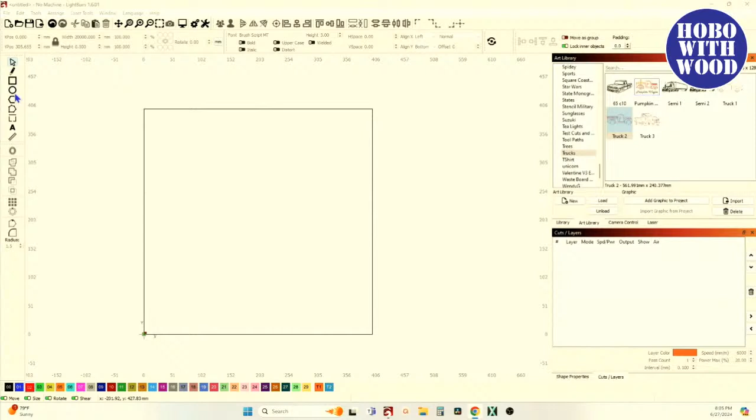And in fact, we'll do a quick idea. I'm gonna come up here. These trikes you see, they're not like a child's trike. A child's trike, well, you'll see a lot of times with the small wheel in the front... or sorry, other way around, small wheels in the rear and a great big wheel in the front. But these adult trikes, they'll be pretty much the same size.

And then you'll have — I'm going to do a basket on the rear.

And then we're going to come up and have handlebars coming out on either side of it, and coming down, attaching to the basket, and then it'll come up and have a seat that's going to be just above that. So these handlebars are going to need to be at least as high as that, and that's kind of why I'm sketching this out now.

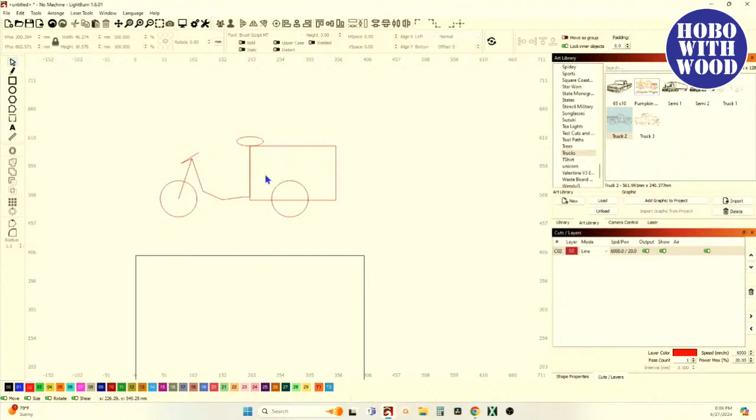I'm going to create the basket first, and then draw everything proportionally to the size of the basket. Then I'll do it so that the basket and the rear half of it, the basket and the rear tires and all that, can be cut out and assembled. Then this piece will be cut out and attached to this.

The handlebars are going to need to be separate because they're going to be on a different plane, because this will be flat. And of course we want the handlebars going across it. The seat the same way. So that'd be one piece.

I entertain the idea of making the front fork actually split and putting a separate tire in there. You could do that by creating the single piece and then doing like I did for the fan on the windmill - just cut two small accent pieces and glue them here over it to make it look like the fork went around the sides of the tires. That's probably what I'll do, because that'll give some more dimension to it.

All right, so now I need to open up a different tab, and let's go to Gravini.

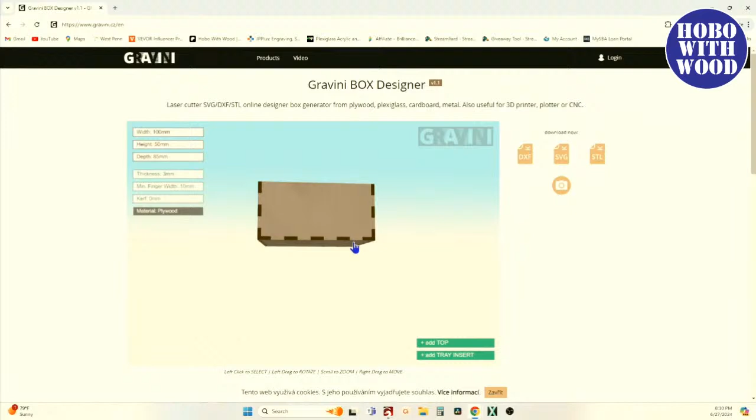And I'm happy with that 10 millimeter finger. I've got 1, 2, 3, 4, 5, 6, 7, 8, 9 fingers across there, and I want an odd number here because I want one.

If I come up here, you'll see that's on the bottom - that finger is solid from the bottom, and I want a solid finger right here, not a tab in the middle, because this is where I'm going to attach my tire or my wheel.

It's going to be a separate piece that will attach to the basket, and I'll create an additional tab that protrudes beyond the outer perimeter that the tire will slide onto. So having that centered there helps keep it all symmetrical.

Now what I'm going to do is use Gravini to create the basket. Here I'm just left clicking on the side of that panel right there, and now I'm left clicking and holding the left button, and then I can use my trackball to spin it around.

But if I just click, it'll give me these options, and I can put different patterns in this panel. So if I wanted it to look kind of baskety, I put those diamonds there, spin it, do it again here, same thing here and here. Now you've got kind of a basket looking design.

Or if you didn't like that, just right click it again and uncheck the diamonds and say, you know what, let's do the bricks instead. I didn't even have to uncheck it, I just have to select it. But if you're looking at it from a point of view like this, here you could click and that's going to get that panel.

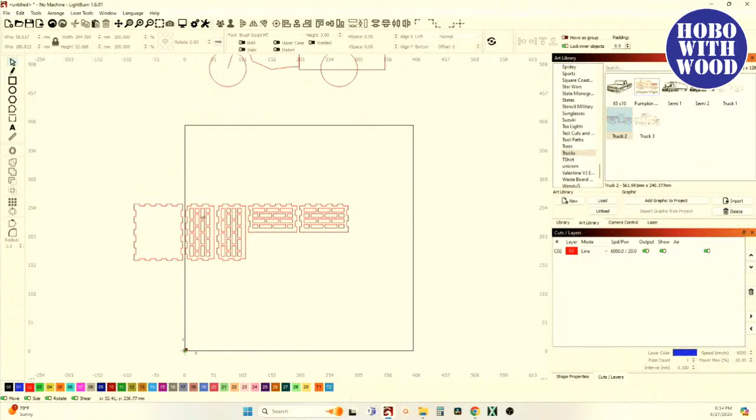Let's see here. All right, so now let's get back over to Lightburn. What I'm going to do is select all of that basket, come over here, and orient everything correctly.

These are upside down, if you will, so rotate those. This one I'm going to rotate once, bring it down here, and then bring this one. I'm orienting this way for a reason - that's the top of the basket, and I don't really want a straight line across my basket. I want to give it a little bit of flair, if you will.

Let's select all of that, ungroup it. Now that it's all ungrouped, I'm going to go to my node editor. So there are no nodes across the top of this except for the corners.

Something I do that probably no other creator does, unless they're watching Hobo with Wood and figured out - this is a good way to make my files LightBurn friendly, so I don't have people screwing up the file or complaining because they don't know what they're doing. I'm going to make this file LightBurn friendly now while I've just brought this in from Gravini. I'm going to fix it so that Lightburn only recognizes a slot as a slot and a tab as a tab, because right now it will recognize it either way.

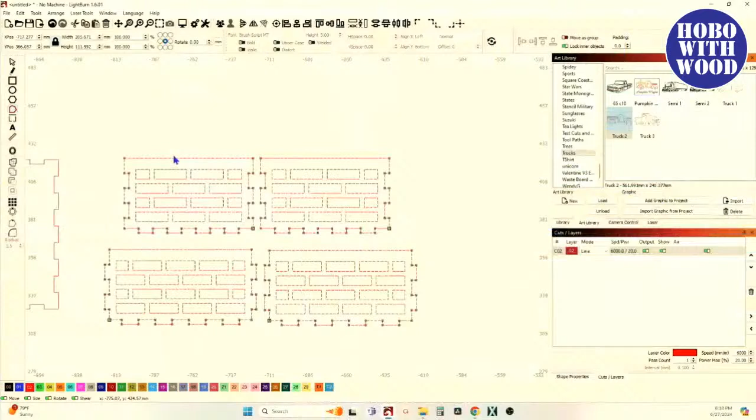So back over to Lightburn. I'm going to select the entire thing, go into node editing, and here's what I'm talking about. In fact, there's something screwy going on here. This is grouped, but there's nothing for it to be grouped to. And I can tell at a glance it's grouped because this right here shows a dash, dot, dot, dash, dot, dot, dash, whereas these are all dashes. And this is not grouped with anything over here, so there's something funky going on.

So I'm going to select just that piece and hit ungroup. Now it's just dash, dash, dash, dash, dash. And I guarantee you there's nothing there. If I select everything, I don't want to get it all. I want to go just shy of it. That way, if there were any loose artifacts, it would grab them, but not grab that whole thing. And then here I'm leaving the other side. But see, it grabbed nothing. There was nothing there for it to be grouped to.

So that's a ghost in the design. And some of you may have had it. I've had different designs I'm working on, and then down here at my origin, there'd just be a random piece that gets attached to a layer. And then I can find it and delete it and it goes away. I don't know what causes those to propagate or create themselves, but it happens. All right, it's all ungrouped.

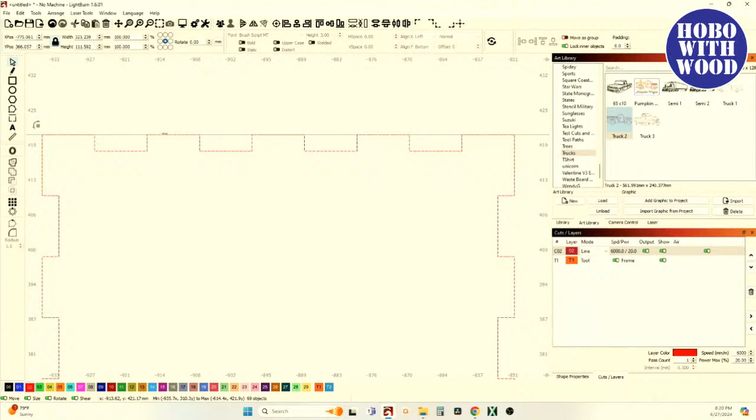Now I'm going to go to node editing, and I'm going to come over here. And like I said, here is a corner. Here's a corner. Anything that's on that plane needs an extra node in it because it should not be recognized as either a slot or a tab. I don't need to do this for my benefit. I'm doing it for yours. I'm going to come over here and grab a tool line, drag it down, and pop it right there on the corner. Anywhere that tool line intersects with the piece will get a node, because as you can see, that makes that solid. So these are obviously slots, not tabs.

And so I'm going to come back here to the node editor, and anywhere that intersects, I'm using the letter M for middle to put a node right there in the middle. Now I'm going to come right down the side. Same thing from that corner to that corner. So middle, middle, middle. At the bottom, middle, middle, middle, and up the side over here. Now, get rid of that line.

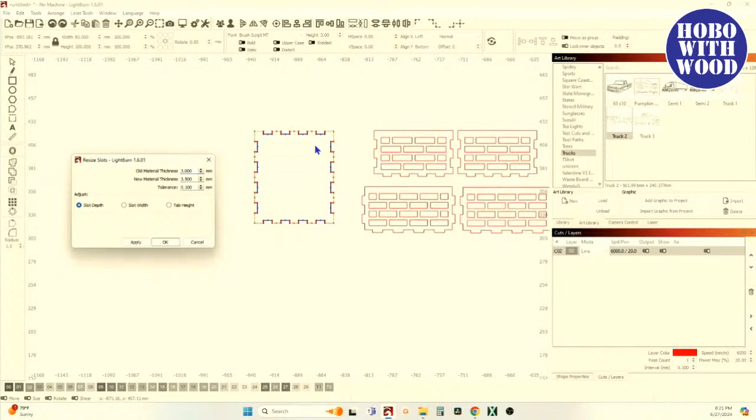When I look at just this piece and go into tools, resize slots in selection, I told it the old material's 3 millimeters, the new material's 3.5, and I'm looking for slots, the slot depth. It's recognizing all those slots. And when we try to look at tab height, there are no tabs because those have got those extra nodes in there. So now Lightburn cannot be confused. So that piece is fixed. And no matter what we do, stretch it, make it bigger, make it a larger basket, it doesn't matter. Those nodes are going to be there.

And to show you the difference, I will node edit this one. This is where it can get a little bit confusing if you're not well versed, or if you've not done a lot of these yet. You have to pay attention. If you say, okay, I need to get all these on the outside, so outside, outside, outside, outside, outside, outside. Well, then you just screwed up, because this piece has got slots and tabs. This one had all slots. There were no tabs over here.

So until you get really, really good, you might consider grabbing these tool lines, snap one to a corner, grab another one, snap it to the other corner, and then drag one down here to this corner.

And go to your corners. Let your corner be your starting point, because now you can see this is a slot and these are tabs. But if I go into Lightburn right now and try to use the tool, resize slots in selection, you can see right there, I'm in slot depth, and these over here on the sides are slots and they are moving. These are not slots and they are moving. That would ruin your design.

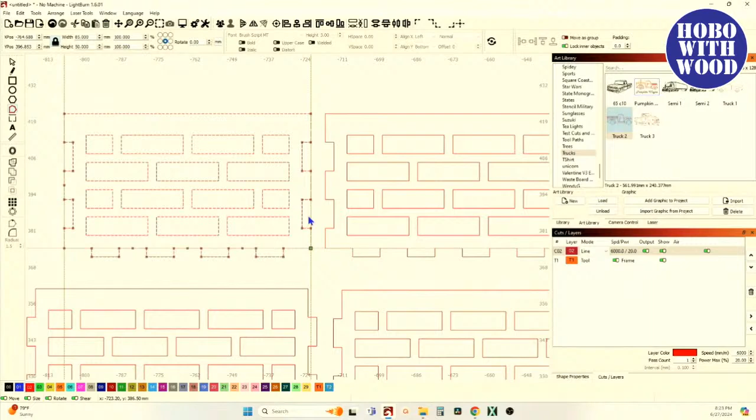Down here at the bottom, these are tabs. So I need to put my nodes down here on this toolpath using the letter M, M, M, and then over here, M. And do need to check this, sorry. Okay, all right, good.

All right, now, what you can do, since we have 2 pieces here that are identical, this piece and this piece are exactly the same, and I've just put all these nodes in and it's done, I can come over here and just select this entire piece, delete it, select this entire piece, Control D to duplicate it, and then move it over here. And now those are ready. I've just got to do the same thing down at the bottom one. I'm going to get rid of these toolpaths.

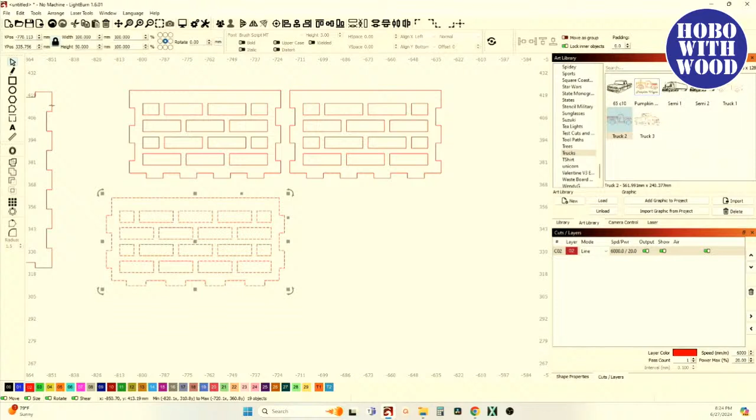And I can actually go ahead and select this and hit the delete button, grab this one, go into node editing, and following from the corner down, and now from the corner across, middle, middle, middle, and corner up, middle. Done. Now take that, Control D, and move it over. Now that piece is ready, and it's almost a finished basket, but there's some things I'm gonna have to do to modify it to attach it to the trike and put my wheels on it.

But I also want to do a different style basket. So now what I'm going to do is I'm going to grab this whole thing and say Control D. Actually, you know what? Before I do that, I want to put the contours on this piece up here, across the top of the basket. So in fact, I can just select both of these, delete those. I'll make the contours on this one and this one, then duplicate them again. All right, so node editing.

Here, the letter M for middle will put the node between the two nodes that are there. So I'll come right over here to the very end, and I'm going to hit the letter M. It put the node over there in the middle of those two nodes. Well, now there's this node and this node. So if I come over here and still hit the letter M, it's going to split that difference. It will continue to split the difference. And then I can come over here and split that difference, come over here, and then there. And now those are all equally spaced. There's some symmetry there.

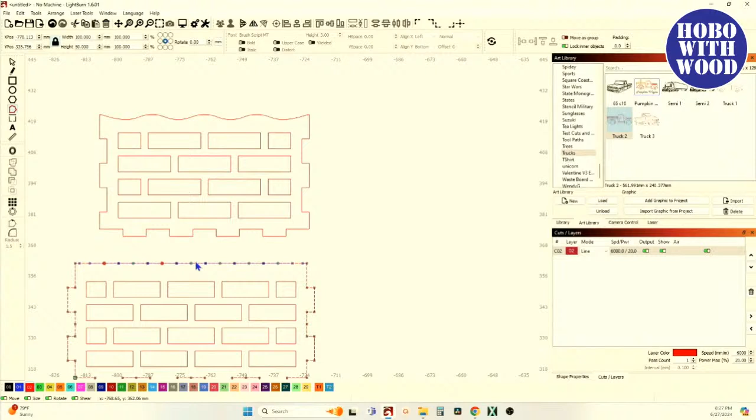So now I need to do the same thing on here. Hit the letter M, M, M, and now smooth them out, the letter S. And now I'm holding my shift button and selecting every other round node and come down 1, 2. And now that's got a scallop on it. In fact, I'm going to go ahead and group this.

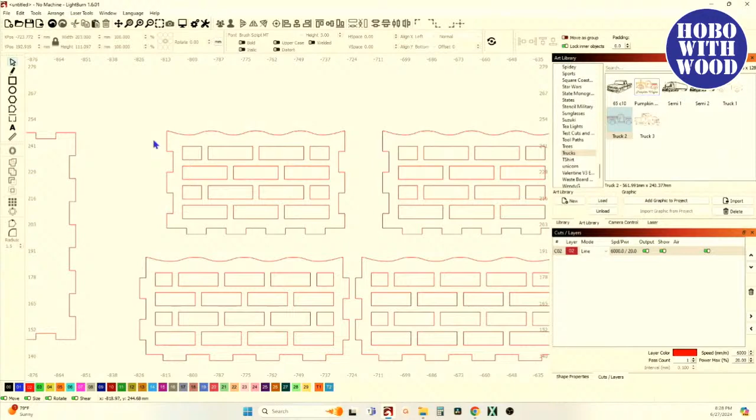Let's do Control D, duplicate, arrow that over. And now I'm going to select the entire thing and say Control D, duplicate it. Bring it down here. Now ungroup all of that. And now I'm going to do something a little different because I used Gravini to create that brick pattern, if you will. I think that's what they called it, the brick. And get rid of all the brick.

Now here, if you've got something in your art library, or if you really like this idea or this concept, but you're a huge dog fan. In fact, what inspired this is I have an electric bike, and I've got one of those toddler carriers. They're for the bikes. You hook them to the back of the bike and you put your kid in there. Well, I hook it up and put the dog in there, and the dog sits and we go down for a ride.

But when it's really super hot, this thing is fully enclosed. It's got the opening on it, and the shade might be kind of cool, but it maybe gets a little hot inside. And so an open air basket would be better. I was looking at those on Marketplace, and I saw one of those trikes, and I was like, that's kind of a cool idea. But it wasn't electric, and I'm lazy, and I did not look any further. But that's when I saw that trike and that basket. I said, hey, that'd be kind of neat.

And somebody had mentioned they'd like to see some different designs of shelf sitters, and that's kind of what this was, just something that sets on the shelf. And the bed served as the basket. We're going to be able to put stuff in the basket. But if you want to make this pet friendly, paw prints or dog bones, I'm going to do dog bones. I'm not going to do paw prints. So let's jump over here. I got question marks, and sorry, I was talking. I wasn't looking.

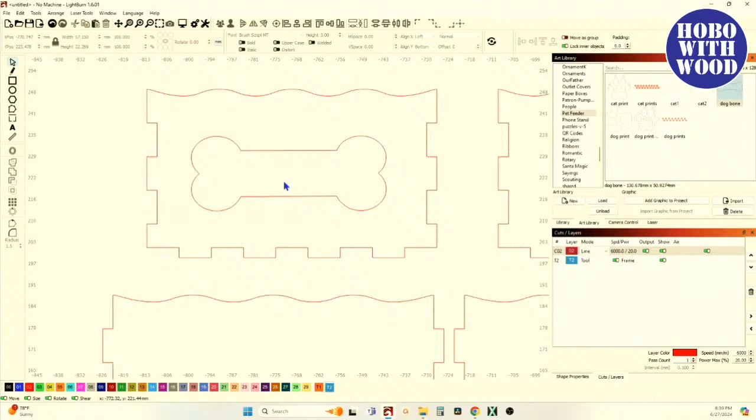But I want to make this smaller, and whenever I drew this one, it looks like it's an open shape because it's grouped. So I'm going to ungroup it and edit. Nope, it's a closed path. I don't know why, are there things there? Is there anything there? No. I don't know why that was grouped, because it's a closed path and there are no other pieces. That's twice tonight that I've had something grouped that didn't need to be.

But now I'm going to shrink this down some more, holding the control button. And I don't like how long the middle is for what this is going to be. So I'm going to go into node editing and I'm going to select all of that. I'm going to bring it in 1, 2, 3. Go there, 3 millimeters. And it's now not as elongated.

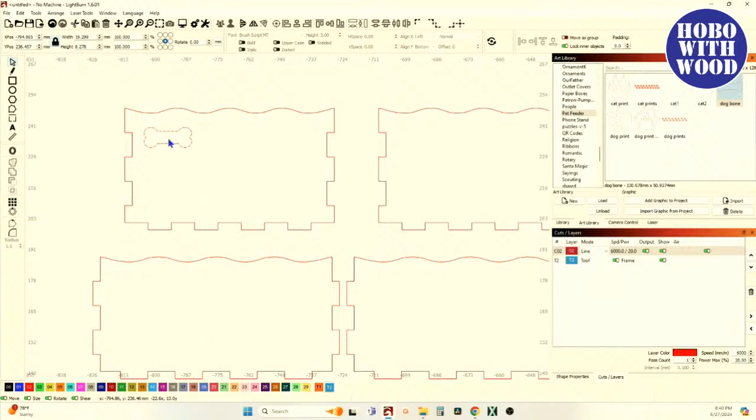But now I'm going to take this and still make it a little bit smaller. And I'm going to bring it up here in the top left corner, about right there. And I'm bringing it in here, trying to be about equal distance from the top and the bottom. And you'll see why in a second, about right there.

Now I'm going to go into the grid array. With the grid array in 1.6, you have this random orientation option right here. And most of you are not going to have that turned on because you may have it and never known what it was for. And if you've never used it, it's not going to be on. But here we need to turn it on.

And then I'm having to check these messages. I'm sorry.

All right. Now, how many columns? We're going to do 1, 2. See what's happening with my bones? So if I turn this off, it's just going to create the columns. In fact, I'm going to leave it like that for now. And I'm going to decrease my X spacing to bring those in about like so. And then if I create rows and I don't shift by half, it's just going to put them all on top of each other like so. And I don't like that look.

So if I shift it by half, that's starting to look a little bit better, but now I've got this great big gap over here. So in order to center this up, right now I want to say group the results and say okay. Now, if I take that group and tell it to go to center, it's got a big gap here and a gap over here.

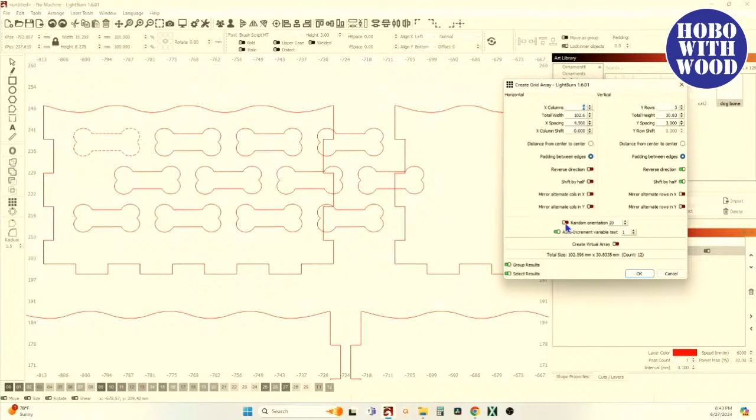So now what I also want to do is instead of just shifting by half, if I turn on this random orientation, it's going to start making a big jumble of the bones, twisting them around at random. And here you've got these overlapping and here overlapping there. It doesn't look good. And you can change it; right now I've got it at number 20.

And what that is, it's a randomizer, if you will. So if I change that, it's going to change the output. But if I got it to where I liked one particular output, it's like, oh yeah, number 7. 7 is the one I want. Well, I could use that same number 7 random number here, and it would be the same pattern in all 4 pieces.

But if you wanted to have this truly random, you would do a 7 here, an 8 there, a 12 here, a 2 there, and no side would be identical. But here I've got these overlapping, so that's not going to work. So now I can start playing with my X and Y spacing to get rid of the overlapping, and don't shift by half. Yep, that don't work.

And here the shape of the dog bone tends to make this not that great of a piece, but to do the random. But if I do this, actually, I do kind of like that. I didn't need all those extra ones because of how long the bones are. All right, I'm going to do that. I'm going to say okay, and that's number 7.

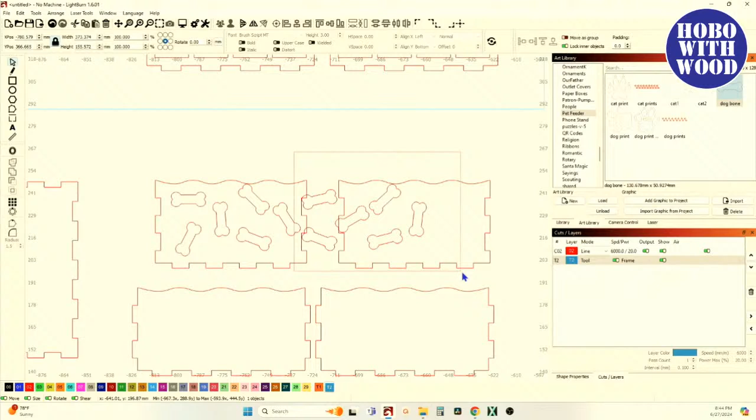Now that that's all grouped, I don't need all of them. I'm going to ungroup it and just go ahead and delete those, group those back together, and now hold my shift button and put that in the center. That's kind of cool. I'll ungroup it, grab my bone, duplicate it, come over here, and I'm going to start this one a little. I'll put it a little cattywampus.

Make sure I got good spacing and do a grid. And I want to decrease. Let's see, I don't want to do number 7 again. Let's do 4. And just changing my spacing to what I feel like I like. And I don't like 4. Let's try switching it up to something different. And at 0, got to go up now. Oh, go back. All right, and say okay. Hold my shift button, put that in the center.

All right, now I wanted to show you this. If this is a little close right here and you don't want that to be that fragile, then what you'd want to do is come in here and I'm going to select both of these and I'm going to do an offset inward and I'm going to do a round offset and I'll do 3.5 millimeters and say okay. I'm not going to delete my original objects.

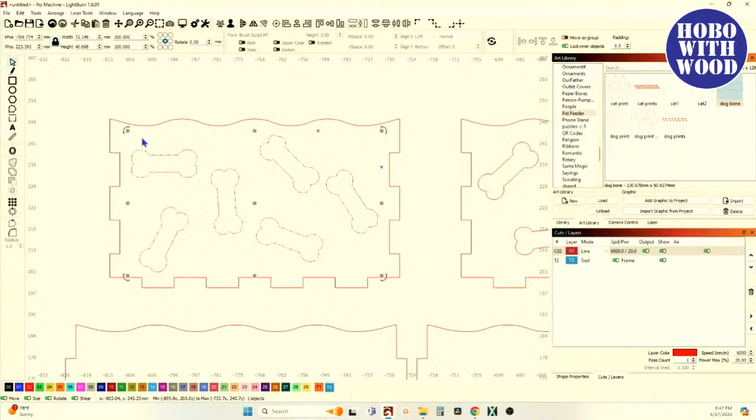And now what I'm going to do is the bones, those are grouped, but I had to ungroup those a minute ago. So let's group those bones back together. Now I'll hold my shift button and select that offset, select those, and Control B will bring up your Boolean assistant. And then I don't want that. And that's the one I'm looking for. So I can say okay. And what that done was just nipped it just a little bit around the edges to make sure I've got a good 3.5 millimeter buffer and it's good and strong.

And those, I had that grouped and I didn't catch that. So let's do that again. Put that back. And now hold my shift button, select that, Control B. And see down here is what I'm looking to, there we go. That's better. Okay. And that gives me that. And I need to do it one or 2 more times. So undo that, grab one of those, Control D, duplicate it. And we'll bring that there. Control D, duplicate that, bring it over here. Let's group those back together and group it with that.

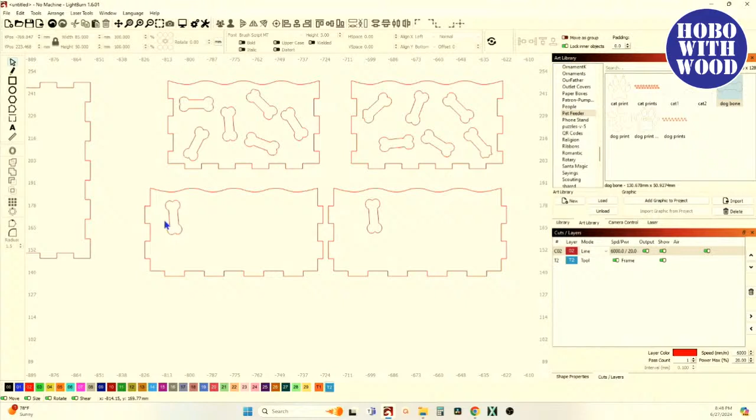And array. Put it in the center. Do my offset. 3.5 millimeters inward with a round. Okay. Hold my shift button, select that, Control B, intersection. Okay. And let's twist this one to about there. And array.

Oh, not that. And change. And you can key in a number if you had one that you liked better than the others, if you knew what the orientation was. You've done enough, it's like, oh man, I really like the way that number 64 puts them out. You can just type in 64. So, okay, and center. That's way over there at the side, and that's way close to the side. That's okay. We're going to fix it by doing our offset.

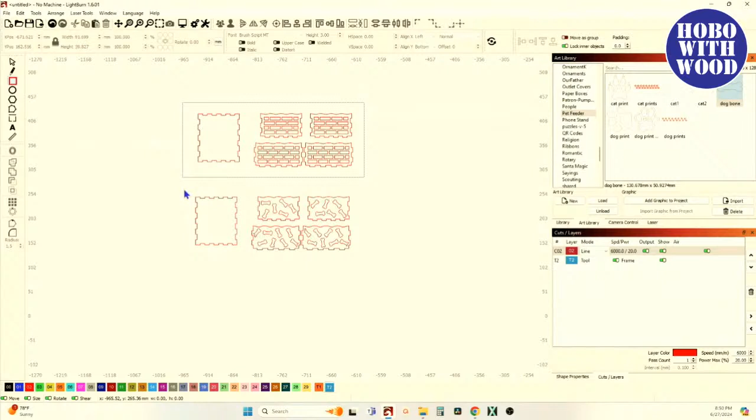Okay, hold our shift, grab our array, Control B, and union, and okay, or intersection. So now there is a random orientation of all four sides to create a dog bone basket. And if I go back over to Gravini, I did 50 by 100 and 85 deep. All right, so go back here, 50 by 100.

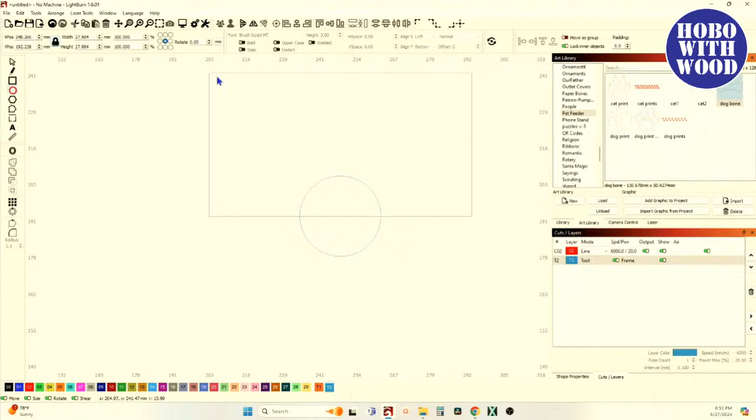In fact, if I grab my rectangle tool and tell it I want it to be 100 by 50, there's the side profile of what my basket's going to be. And I'm going to leave that on the toolpath. I'm going to come down here, and I need a wheel. Holding my shift button, I'll come right here to where I feel like I'm about in the center, shift and control to draw it out from the center. And since this was 50 millimeters, wasn't that right? 50? Yep. I'm going to make the wheel 25 millimeters.

All right, I may end up making that a little bit bigger. In fact, I am. Let's do 35. That looks better, 35, and that'll be the same size as the front one. Control D to duplicate it, and bring it out here to the front.

Now let's start drawing a tricycle. Let's draw a rectangle and I'm going to put it there. That's kind of centered up. And then I want to rotate the fork to where I think I want it, which we'll go with about right there. I think that's what I want.

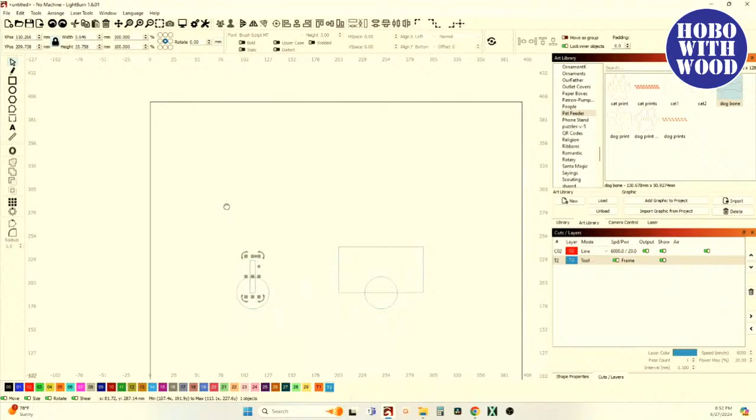But now, like I said, I drew this fork a little bit short compared to where my basket height's at. So I'm going to undo this and stretch that out because I need that fork to come up to at least the height of the basket when it's rotated. So now rotate it. Yeah, that's looking better.

All right, now let's draw another rectangle. Actually, I won't use a rectangle, I'm going to use a line, my pencil tool. I'm going to come right about here, come down to, we'll come down just a little bit below the basket. Come over here - well, it's not even below, it's close. Hold my shift button to get a perfectly straight line there and a perfectly straight line up to there. All right.

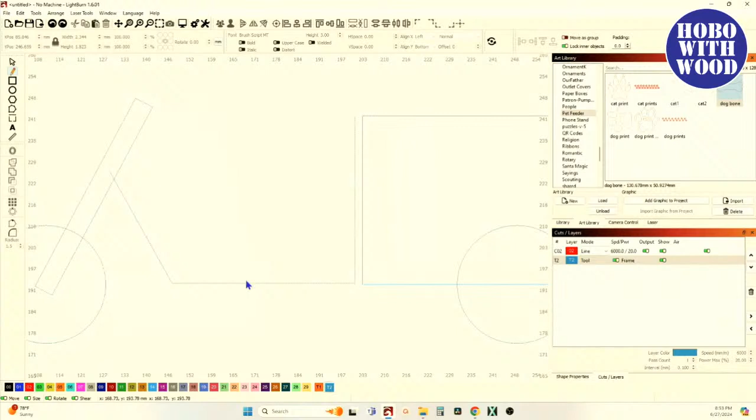Now I'll use my pencil tool to do that. I'll go back, select that, and I'm going to do an offset outward, and say 3 - no, not 3, we'll do, just try to see what it looks like, 2 millimeter outward offset. Delete the original and OK.

All right, now I don't like the corner right there. I do want a radius on the bottom, and there, and there. So if I go to my radius tool, in fact this was what I do - here to here was, so I've got about a 4 millimeter spacing. So if I come here to radius and I look at a 2 millimeter radius, I don't think that's going to - yeah, that's good, that'll work. And in here too.

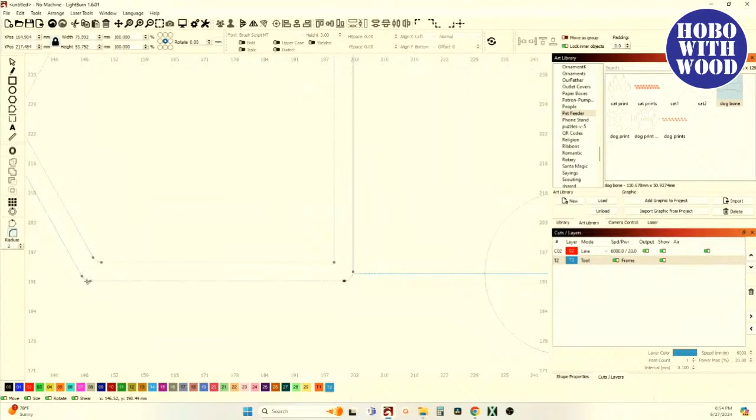All right, here. No, let's just undo that.

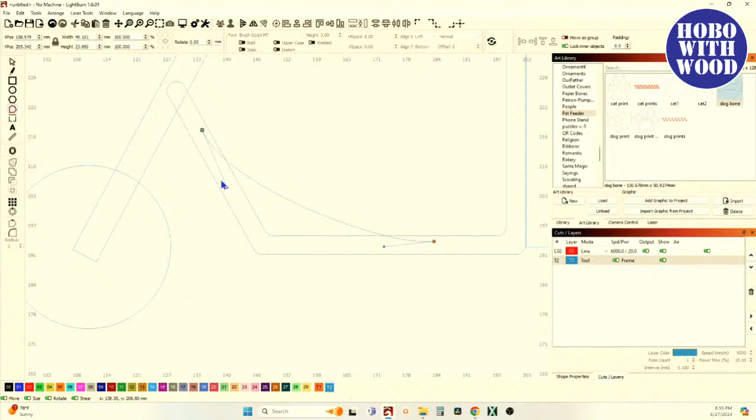All right, now I'm going to draw another line from here to here. Offset - no, don't want to do that yet, cancel. Node editing, and now I want to put a little curve. We're going to make this up top, up higher, bring it up here, bring this down here. And offset, and this one needs to be 1 millimeter. So, delete the original.

Okay, weld that into there. And I don't want this radius up here, so now I'm going to ungroup that. And here, this is what I was talking about a minute ago, Randy. Lightburn created this radius here whenever I did the offset. But here's node 1, node 2, node 3, but then here's just one arbitrary, so there's 4 nodes there. If I was to delete this node, letter D, and then delete these - no, I don't want to delete that one, delete just that one, and then tell that to go to line mode. See, there's that slant because those nodes weren't parallel to each other, they weren't perfectly across from each other. So that's how you get a slant when you're trying to get rid of those radius.

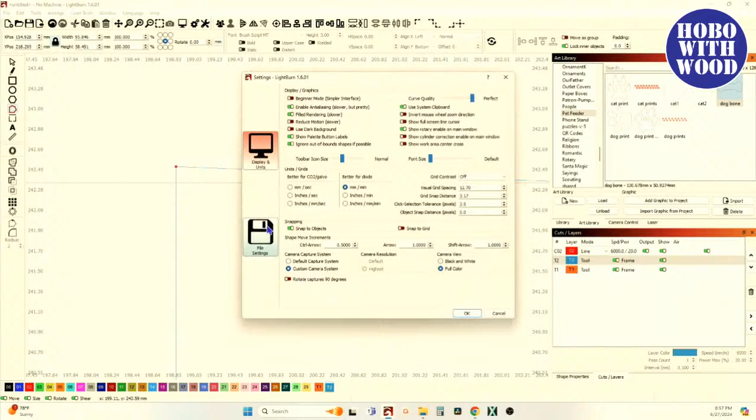Now, one easy way to get it level - grab your toolpath, bring it down to one of the 2 corners, then go to your node editor, grab your node, and just start bringing it. Oh, that's too far, that's too far, got to set my movements - 0.002, and start bringing it down till it's on top of that toolpath. And now you've got a straight line across there.

And now I need to put a tab on this one, so I'm going to draw me out - it needs to be 3 millimeters high, and we'll do 2 millimeters. I need to unlock my aspect ratio, make that 3, because the material I'm going to be making this out of is going to be 3 millimeters high, and I'm going to make it a 2 millimeter slot. That's where I'm going to stick my seat.

But now here, if I tell this, I want it right in the center of that. If I got that selected, hold my shift button, select that, and tell it to go to center, where'd it go? Over there, because it's centering the whole piece. That's not where I want it to go.

So you can do this a couple of ways. If you're really good with your mouse and have good eyeballs, zoom in here and move your mouse across that line. That gray bar is telling you that's the center of it. But if you get on the line, see how you get the circle in your cursor? That's the center point of that design. Bring it from there down here and look for that center point, and now you've got it perfectly centered.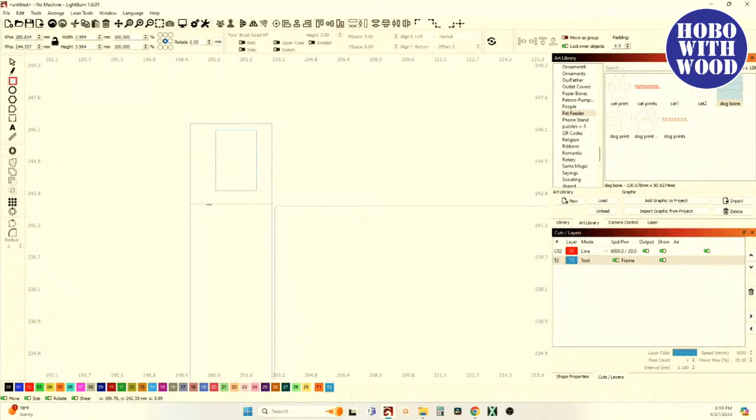So now I can use that to select that piece and tell it to go to the center, and that puts it in the center of that lower piece. Then once you dock it down to it, it will be perfectly centered up.

So there's 100 ways to do things in Lightburn. There's no wrong way, no right way. It all works if you get the result you want.

Then weld those together. And it didn't weld together. Undo. And now weld it. There we go. So that little spike is where I'm going to put my seat.

Now I'm going to come over here and put a little spike over here for my handlebars. So here I'm going to draw out another rectangle, 2 millimeters by 3 millimeters. But now I've got a problem getting this in the center and properly aligned.

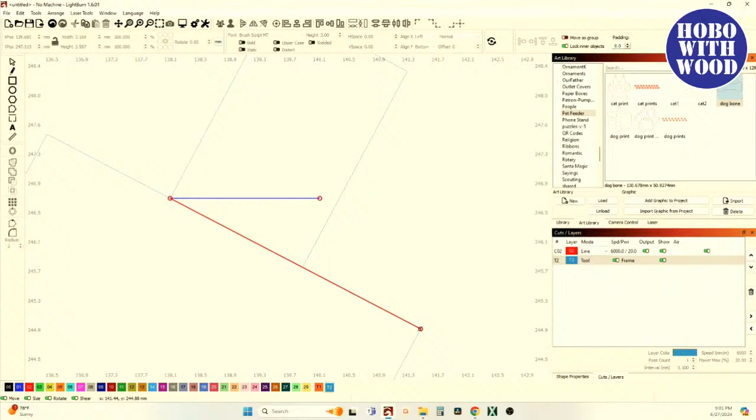Well, here we're going to use our Control 2. With that piece selected, hold Control 2, then select that corner point, come out here to this point and left click and hold. Once you've left clicked, you can draw this out as far as you want. I'll draw it down to this corner and make it snap right there, and now that's going to align it to the proper angle.

I don't know if it's centered yet, but we're about to find out, because now if I find my center point right there, I can come on this line. I've got the angle right, so no matter where I slide it up and down that angle, I'm good. So now I'll slide up that angle until I find it... there, right there.

That's centered. So now I can hold my shift button, grab that, and weld them together. Got a little funkiness going on there. Use your node editor, select that node, hit the letter D, and clean that up.

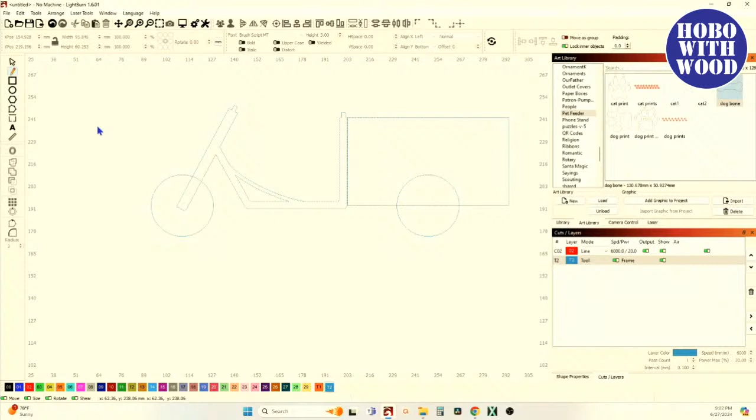Fender and handlebars, all right. So I'm going to draw out, this was a 35 millimeter circle, but I don't want a circle, I want a straight line. I'm going to do a straight line instead, let's say that was 35, we'll do a 45 millimeter straight line.

Bring that down here, and I want it to start about there. What I'm looking for is the front lip of the fender. Actually, we're going to bring it on over here. Go to node editor.

I'm going to drag this down to where I think I want the height of the tire to be, about like that. Come down here, the height of the tire or the fender. I didn't need to worry about the length, I needed to put my beginning and end nodes where I want them to be. I want the bottom of the fender to be right there, the top of the fender, the front leading edge to be there. So there's the beginning and end. Now I just need to grab the middle of that line and stretch it to the shape I want for the fender.

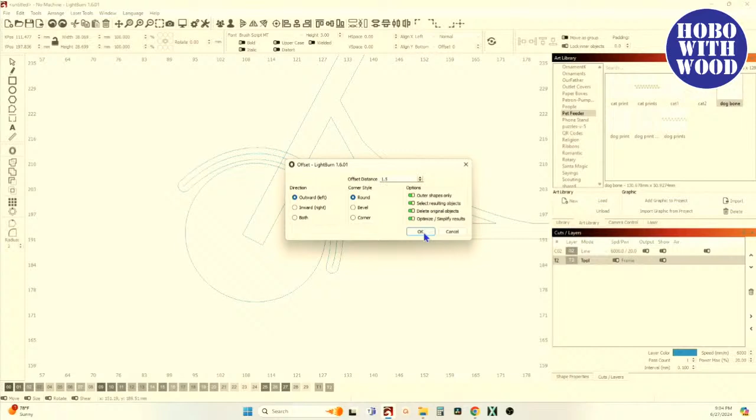Now I want to try and keep this distance around the tire kind of parallel, so I can use these arms to elongate and stretch that curve to give it the shape I want. About like that. Now that I've got the curve right, I can do an offset, let's do 1.5, say okay, delete the original, hold my shift button, select the frame, and weld that all together.

So there's the frame, the tire, handlebars.

All right, if my box is... let's see, where, there. Actually, you know what, I don't want a rule tool, selector tool. The box is 85 millimeters wide. Then let's look at straight line.

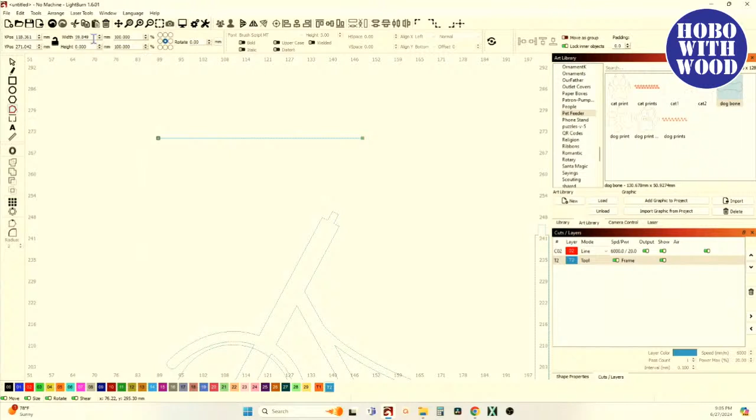Then I'll draw a straight line from the end of each one. Actually, I should have duplicated those so I knew I had the exact same length. Oops, didn't want to do that. I want to select that line. Did I connect them? Yes, I did.

That's all right, I'll use a toolpath. Come up here and grab a toolpath, pop it right there at the bottom of that line. Now I can see where that line needs to end. Go into node editing and just arrow that up ever so slowly.

I'm using my arrow keys because I want to go straight up. If I use my mouse to drag it, I could skew it a little ways. Instead of adjusting my movement distance, I'll just patiently wait for it to get there, just like we do Christmas. All right, now that I got that, I can delete that toolpath, select that, do an offset, and delete the original. There's the beginning of the handlebars.

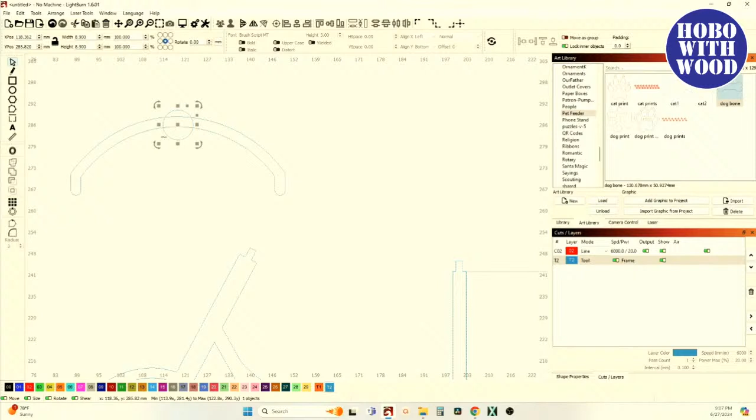Now I'm going to draw out a circle, start with a circle, and tell it to go to the vertical center and the top. Then I'll just arrow it up to there. Now that I've got it kind of where I want it, I'm going to hold my control button and make it a little bit more elongated.

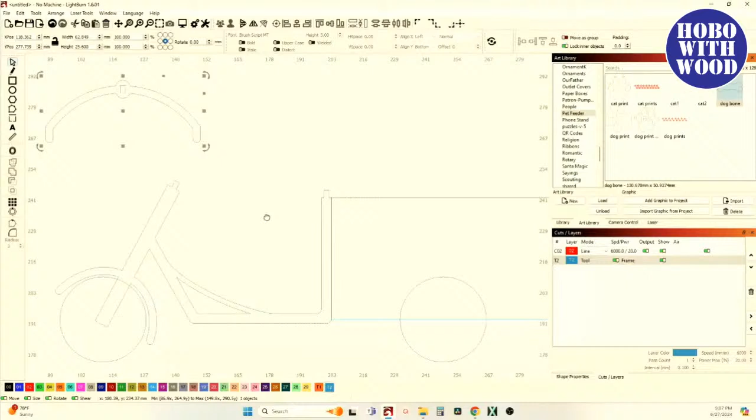Now I need a seat. The seat, I'm going to draw out kind of an oval shape to begin with. Convert to a path, show my nodes, and select just that node and start arrowing it up a little bit. Now I'm going to come to this node and hit the letter C, and come to this node, hit the letter C, and that will make those corners. But I can now start stretching this in.

Do I want to do C? Yeah, I think I want to do C there. Let's try not C. If I don't make it a corner, see, that starts moving out and messing things up. By converting it to a C, or a corner, it'll only move one side of it.

So undo, and if I come over here, what are my options? Convert, let's see, C, smooth, C, convert node to a corner. Yep, I want to do C, letter C. Right now you can see it's still a round node, so hover over it and hit the letter C, it'll turn it into a square. Once you see it's a square node, that's now a corner, it's no longer a circle. So I can bring that in, bring this one in.

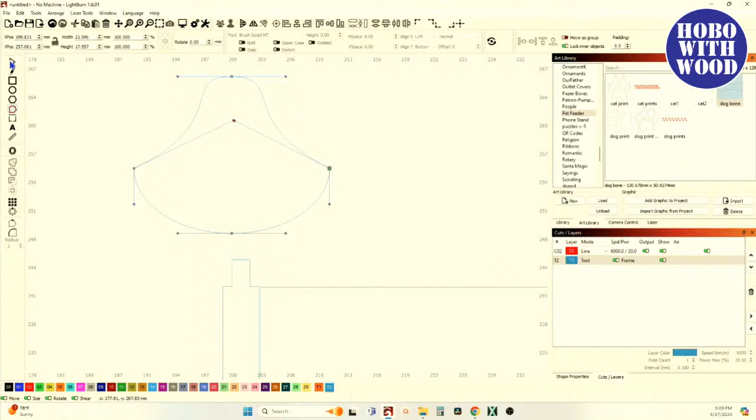And that's starting to look more like a bike seat, but it needs to have a 2 by 3 rectangle in it.

And I'm going to put it in a vertical center. And I think I like that placement there. Now, group those together, and now I'm going to look over here at your comments.

In fact, Dan says he thinks my handlebars are going the wrong way. No, those are going to be sitting on top of this like so. So that'll pop down on there, and that's going to be pointed to the back. That's pointed to the back, but you're going to be looking at it from the side view, so that's correct orientation.

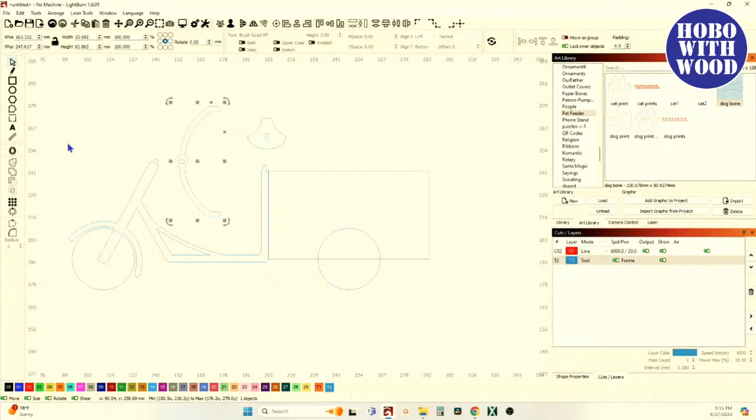But now there's some tricky stuff, but before I go into there, I'll go back over here and look at all the comments. Let's see here. And I appreciate y'all hanging out, but this is something I would normally do during the day, and then I would be designing this, and I'd cut it out and try it and see what I think, make some changes. So when you finally see this Saturday, it's going to look something like this, but it's probably going to morph a half a dozen different times before I finally land on something that I really, really like and I feel like is marketable.

But let me come back up here. All right. Yeah, Brad, I've seen a few. In fact, I uploaded the 1.6.01 on the laptop today. I don't know how long it's been out, but there's little bitty kinks going on. But they have to do some really, really stupid stuff before I start knocking Lightburn, because for the price and for its capabilities, it's really hard to beat. I mean, some of the other softwares out there you can do more crazy and more elaborate things with, but when you start talking about $200 or $300 monthly subscriptions, no, thank you.

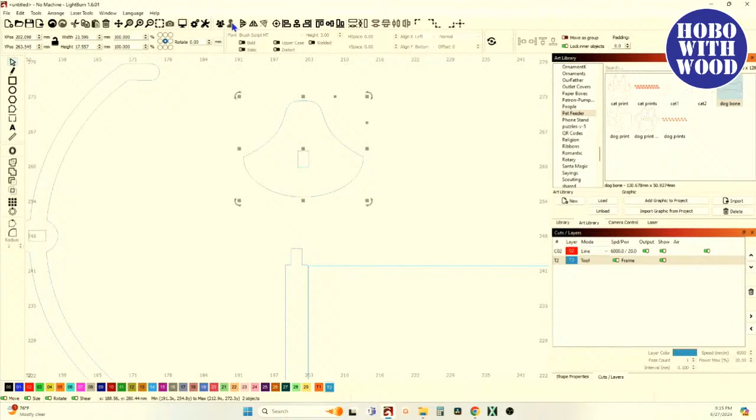And now select it, radius tool. Right now it's set for a 2 millimeter radius because I'm working in millimeters and I got the value of 2 in there, and a 2 millimeter radius.

Yeah, thank you, Ed. That just makes that look even that much better.

So now the next thing, because right now my plan is this is going to be a separate design, a separate piece that will be assembled. The body, the actual trike, will be a separate piece. And in my final version, I won't have this long squared off. I'll do a more rounded lower tube. But I wanted to get something together here, and this will be easy enough to modify.

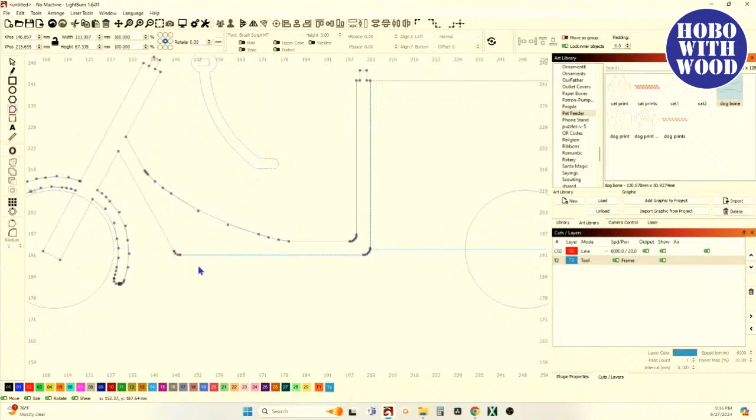In fact, you can say, you know what, let's get rid of that. Let's take this, go into node editing, and I'm going to select all those nodes right there, and I'm going to hit the letter D, not the delete button. When you're in node editing, do not use the delete button. When you hit the delete button, you delete everything, and it's not your friend. Undo. So you select everything and hit the letter D for delete, the letter D.

Now that I got those deleted, I can just come up here and grab this and bring this down here and anchor it about there. And I come over here, I'm going to insert a node here and a node here and stretch this on down. And I need to make those corners so they don't do anything silly up top there. C and C. And now I can stretch this out. And actually, you know what? I'm going to get rid of that. Delete. By bringing this down here like so. And then stretch this.

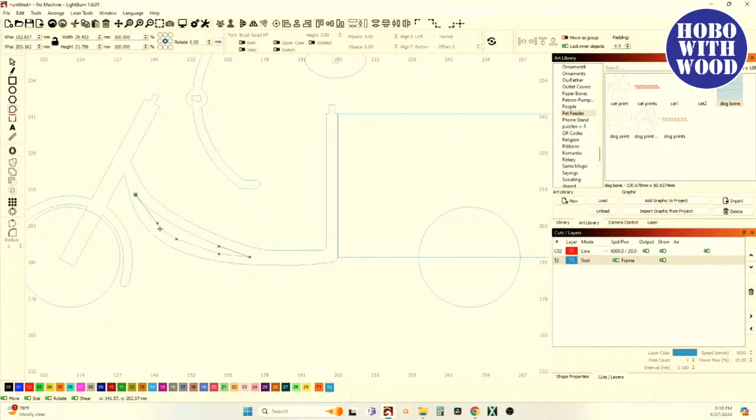And then you could do a pencil if you wanted to and just draw in that shape. Oh, didn't want to do that. Nodes. Letter S's to kind of smooth that out a little bit. But my final version will be more aerodynamic and more pleasing to the eye. Not really like that, but more curvy. We'll make it feminine. We'll give it some curves.

All right, but now the challenge is, like I said, I'm going to design the basket, and the basket's going to assemble, and then I want to put the wheels on the outside of the basket, but I don't want them just glued to the face of it, which you could do, but I want to make sure that they are symmetrical from left to right side, and they can't be off. They can't even be off by 0.5 millimeter.

And wow, okay. Thank you, Tom. Appreciate you. I really appreciate you.

So because this is just my OCD, I want those symmetrical. And to do that, I'm going to put an extra tab on top of the other tab on the bottom basket that will make those rear tires exactly positioned, exactly the same, left and right side. And then I've got to connect the front half of the trike to the basket. So let's see how I'm going to do that.

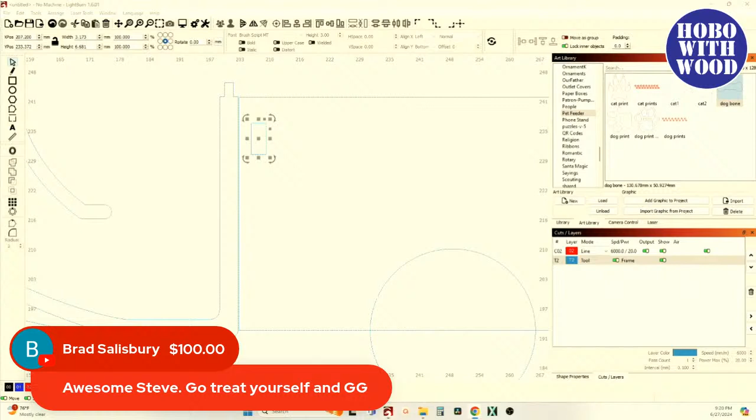I'm using 3mm wood. So this needs to be 3mm wide. And on my slots and tabs, the minimum I'll do is like 3 and 6, so twice the width. I can do bigger. That's the minimum. So now I'm going to do 10 and see what that looks like. And that's better. And I think 10 is what I used on the basket.

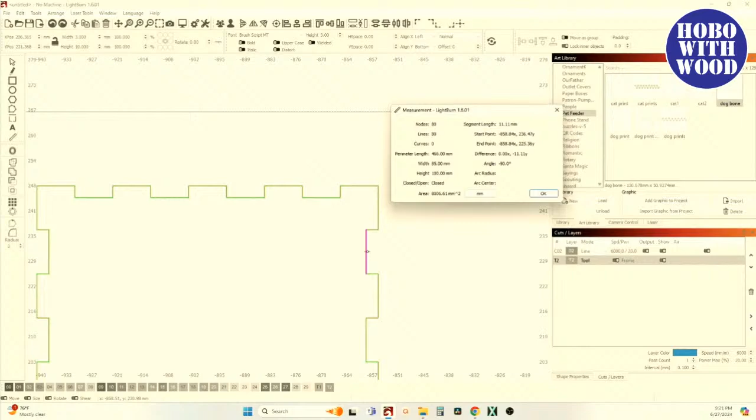And if I do that and position it about like so, then do a grid array. Okay, now I need to turn off my random orientation. I need to turn off my shift by half. And I'm going to increase my Y spacing to 6 and 3 rows.

I see that 10 is going to be too much. So I'm going to say cancel. And we'll go to 8. 3 and 8. And move that up a little bit. And grid array, rows, turn all that off again.

And here, because the last time I used the grid array, I used the random orientation and the shift by half to create the last arrays. So now when I open up the array tool, those are automatically turned on because they were used in the last creation of an array. So that's why you see those on. So just know that the last settings are what's still there. So now you need to go back, turn off your shift by half, turn off your orientations.

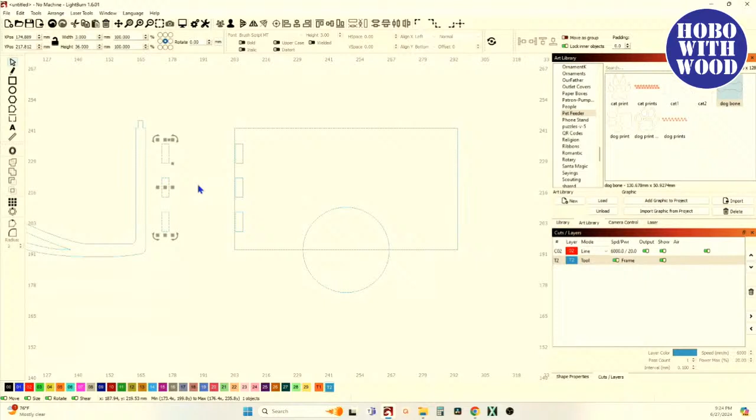Andy's saying you might want to double check the 50 by 100 box size. I think your aspect ratio was locked when you sized it, so the height might be off a bit. If you're talking about this toolpath, yeah. Right now this is just a toolpath. This is not being used for anything at all tonight, other than just looking to see about that size of that tire. And that still works, because even if you hadn't caught that and pointed it out, and thank you for doing so, this piece is actually irrelevant for what I'm going to be doing. These pieces here, I'm needing to attach to this spine on the bike.

So if I select that and hold my shift button, select that and say control, let's see, alt shift, no, not control alt, H, no, what is it? I forgot my align tool.

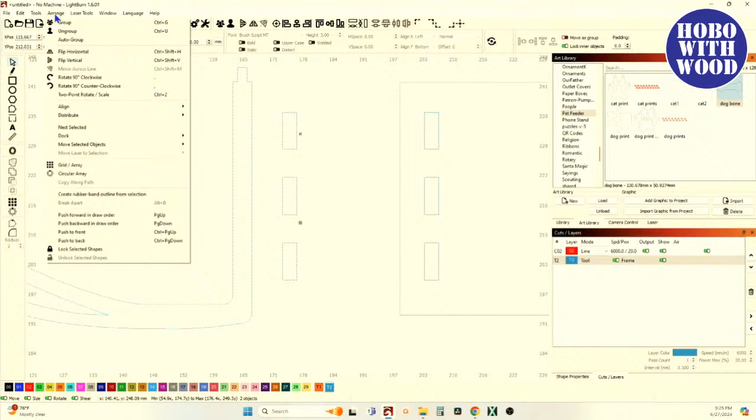Brad's got me all flustered. Thank you, Brad. You got my brain all flustered. Man, I'm extremely grateful, brother.

Align, align. No, not align, distribute. Alt Shift H and Alt Shift V. So select here, and Alt Shift H will align those horizontally against each other. And what I need to do now is I actually need to move this stuff down here. I'm going to need these. But now I'm going to weld these together.

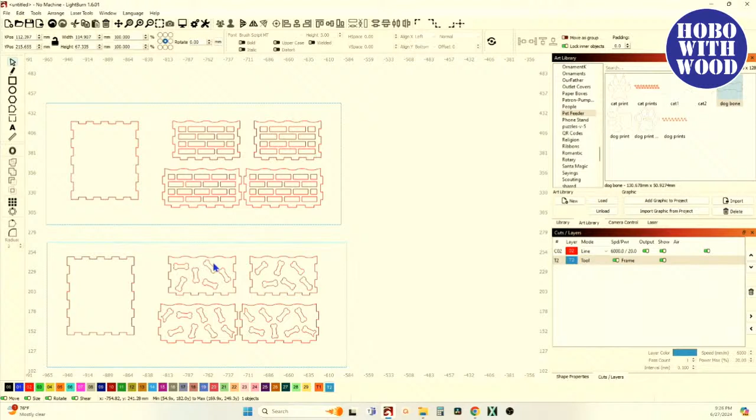And because all that's grouped, it's not letting me do any of my Boolean tools, so I have to come back there and ungroup it all. Now I can select those tabs plus that and weld them together. And those are the 3 tabs that are going to slide into the basket. Now this will be the front leading edge of the basket. And I'll grab this one for right now. Say Control D, duplicate it. And I'm going to bring it down here.

And if this corner was going to be about there, just below the seat, then that's the height it needs to be. Then I can take these, select this and tell it to align in the center. Actually, I could have just done center. There we go, like that. Centered up on that piece there.

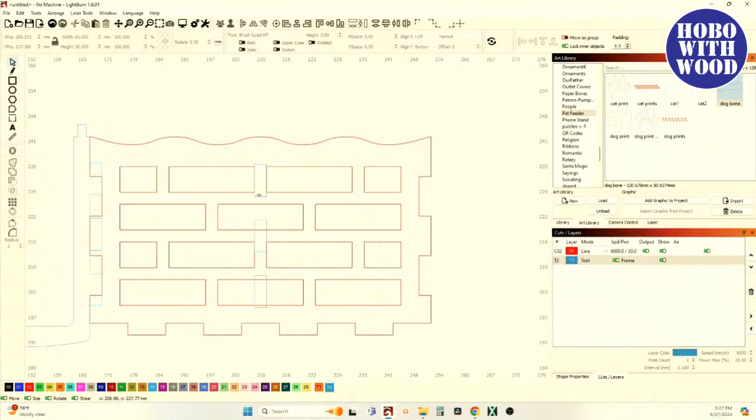Now it's like, well, wait a minute. You got all those holes. Those are the basket, the bricks cut out, or the dog bones, what have you. That's okay. All I'm going to do here is come to these slots and do an offset. And I want to do a 3 millimeter offset. Do not delete the original. And say okay.

Now I will select all of those bricks. I need to ungroup that so I get just the grouping of the bricks. Oops, nope, they're not all grouped. It's all right. I only need those because those are the ones intersecting with it. So I'll group that. With that group, hold my shift button and select that offset. Control B to bring up your, come on now. Boolean ain't going to work. Boolean worked for me before doing this. Oh, it's because I got all those grouped.

Dummy. All right. So I've got my toolpath selected along with my inner slots, that offset rather. So the offset, I need to ungroup all that. So those are separate. That's fine. Now I need this one, this one, this one, this one, this one, and that one, and group those together. And now hold my shift button and select just that offset, and that'll bring up my Booleans. Control B.

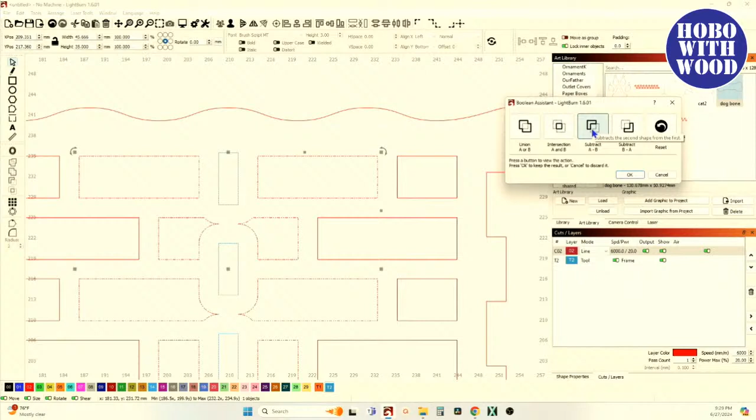And what I don't like is I don't like those points. So instead of that, I will just ungroup those. And I'm going to come over here to the side, grab a toolpath, put it to that corner of that brick, grab another one, bring it to that corner of that brick.

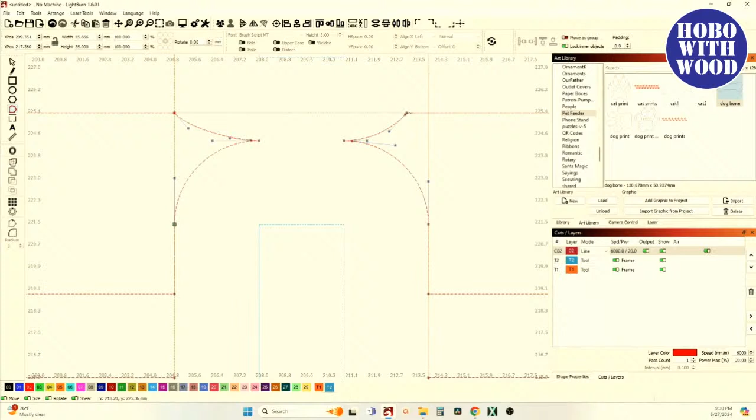Now with those, I'll go to my node editing tool. I'm going to bring this node, and actually, you know what? I need another straight line, so I will come back to my selector tool, bring it to that corner. Now go to node editing, drag it to that intersection, drag this one to this intersection, and now select all of these and hit the letter D. All of these, hit the letter D.

And I need another one. Nodes. Letter D, and I missed one. And get rid of the toolpaths. Selector tool. And put all those on a cut path. So now I've got slots there that would line up with these slots and attach the bike to the basket. That can all be on a cut path.

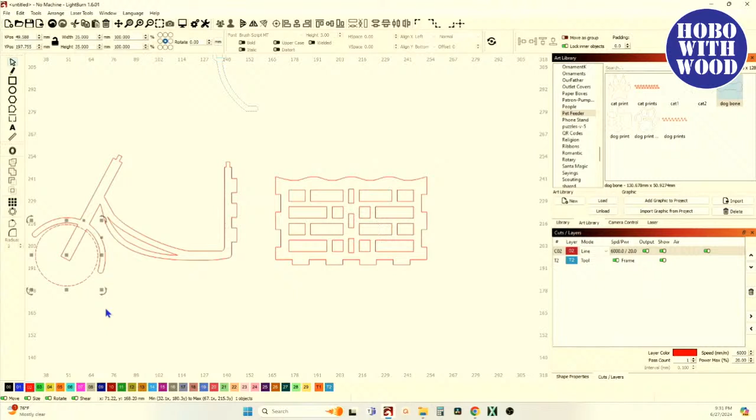And I would need to redo this whole frame. I really don't like that, but that's okay. That'll be one of the things that gets modified. But right now, this would be where I get my first mock-ups. You know, something I can start putting together and find out what works, what don't work.

Now what I want to do is I've modified that front piece, the front leading edge of the basket. Now what I need to do is modify the bottom. Grab it. I'm going to duplicate it. Not going to mess with my original designs.

Before I move any further, looking back here for any questions, comments. Let's see here. All right. Yep. Got Andy. All right. Got that. Come on down. Come on down. Come on. Not right. What is that? Not come on down. Get on down. Get on down the road.

All right. We're an hour and a half in here. We're getting close. This is where I want to try and start wrapping it up, but we're getting close, and I want to get the tires, the wheels done, and then modify. Show you how I'm going to add it to that base.

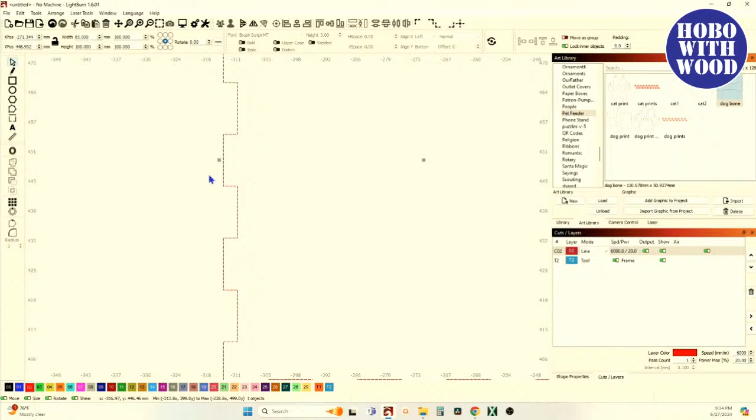So if I attach another rectangle out here, and then do the same size on the inside of the wheel, that'll give me a little protrusion here that will give me my alignment demarcation or a place to mount that tire and wheel to the outside of the buggy, and it'd be perfectly centered.

So I'll come back over here and I will do the same thing. I'll do a 2 and a 3. So it's going to be, let's see here. This will be on its side. So it's going to be 2x3.

And now I'm going to get my circle on my cursor right there, come over and get it right there. That's perfectly centered. Now see there, it's a crosshair. You get that double instead of just a circle, you get an actual bullseye or crosshair because that's the actual center of the entire piece.

So if I was to take this and get my circle and come down here, I can get a circle right there, but you see it's just one horizontal line. You don't have that vertical crosshair because that lets you know you're in the center of that line. But here we're not only in the center of the line, we get a double crosshair, a vertical and horizontal. Now we're in the center of the line and the center of the piece.

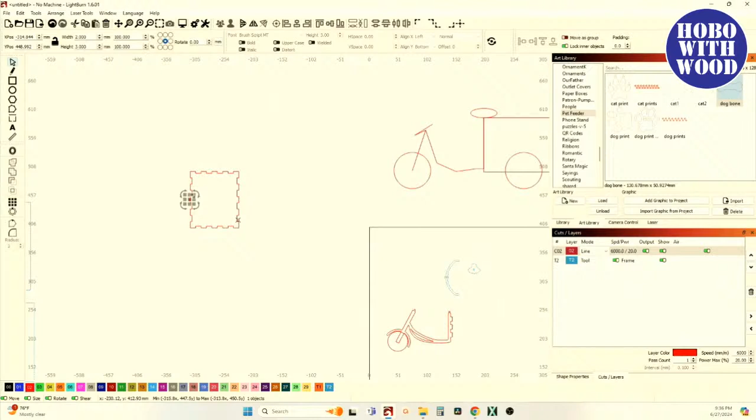And I'm going to say Control D, duplicate that, bring that over here and get my little circle and look for my, there we go. Now I can select that, hold my shift button, select that, group it, hold shift, select the whole piece and weld it. So now that'll snap together just like any box would, but those little pieces are going to be sticking out, and I can do my 2x3 rectangle in my wheel.

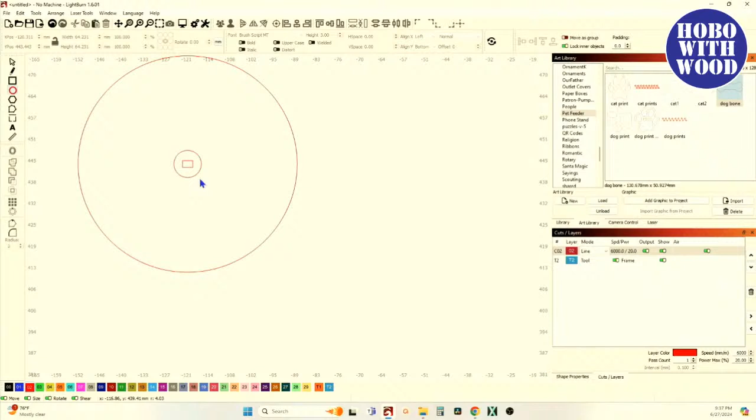Put it in the center. And that's where that's going to snap on. Now I'm going to come back to my circle tool. I'm going to hold my shift and control, get my crosshairs right there. And by holding shift and control, it's going to draw out a perfect circle from the center. And I'll do about there.

Now I'm going to do an offset. Let's see, here, we'll do an offset of, you know what? Let's do inward and outward. We'll do both inner and outer and do 2 millimeters. So that's going to be a 4 millimeter total. Delete the original. Okay. Now, pencil. I'll come up here, find the center. Right. I'm on there. And I didn't want to do that. Let's try it again. Undo. Pencil.

And I'm just going to come up here in the middle of that tire. Start a line, hold my shift button, and come down here to where I'm within that circle there. Left click to stop drawing. Now I'll select that piece, hold my shift button, select that, and tell it to go to center. There we go. Now I'll select my line, select the circle array, and I don't want to do 12. We'll do 10. That's rotating those around there. Say okay.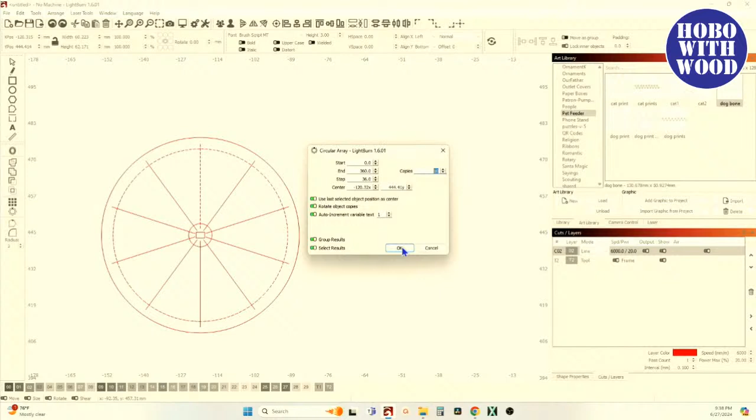Now with those selected, go back to the offset tool. We'll do 1 millimeter. Delete the original. Select just the inner. Now here is where a lot of y'all get confused on trying to get the result that you're looking for. This right now is just the inner part of the tire. There's the outer part of the tire. Here's the center hub.

Now the center hub's pretty easy. In fact, this right here was created with the offset. We can ungroup that, select that, and just delete that. That's trash. But we need this center hub welded to this, and that's easy enough. You just weld those up. Now you've got that all one piece. But this is where a lot of you get lost. You're like, I want to get those spokes cut out of that tire.

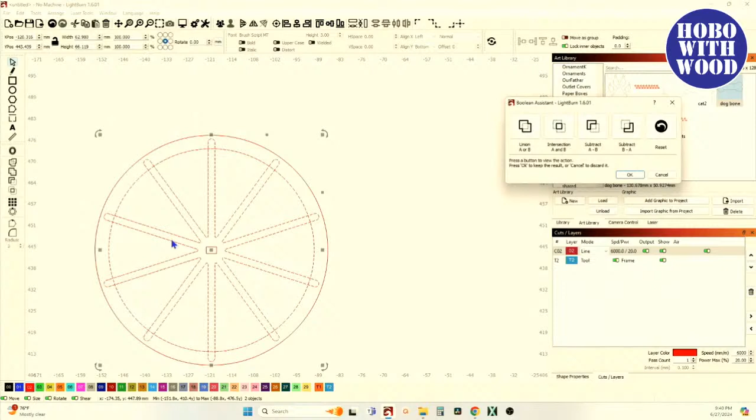And if you've got these two grouped together, and then you hold your shift button and select your spokes, and Control B for Boolean, that works. That don't work. That don't work. If I didn't have these grouped, and you do your Boolean, you don't get the same results because that's what worked a minute ago. Now it don't.

So what you have to think about is, what are you selecting? All right, here you're selecting just this one inner circle, and that's one solid disc. If you were to put that in a fill mode, you've got that whole solid circle right there. And if I bring this to the top by moving it down the layer, there we go.

And you say, you know what? I want that in there. So if you say, all right, I want that blue disc, hold my shift button, and then select those and hit the subtract button. Well, that subtracts that from that blue disc and gives you that.

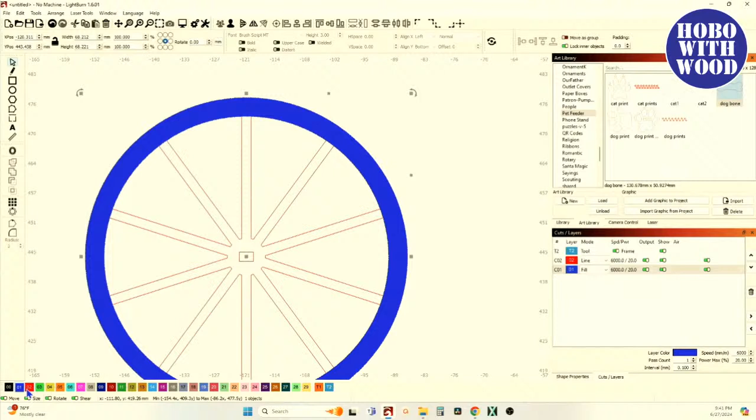So instead of subtracting that, you'd want to weld it, because there's nothing in here except for the spokes. That's why you'd use your addition tools - say A or B and weld those together to get that. So it's like, do you want to subtract it or weld it?

Well, it depends - what are you selecting? Are you selecting the tire or the inner disc? Let's see here.

Are you going to have a 3 millimeter square on each side of the bottom, sticking out 2 millimeters from the side? That's sticking out 2 millimeters, and actually, yeah, I'd want that sticking out 3.

So that would be one of those adjustments I'd have to make when I went to put it together. It's like, well, no, that needs to be a millimeter wider. So yeah, I would add another millimeter there. That would stick out 3 millimeters. So it's the thickness of the material, and it would fit on there.

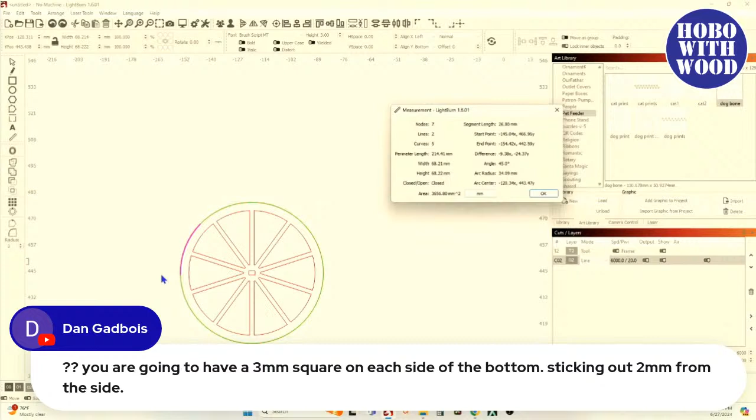So I did 2 millimeters where I should have done 3 millimeters. I should have done a 3 millimeter square there. Yeah, like I did a rectangle and I should have done a square.

And that'd be easy enough to correct by simply going to your square tool or rectangle tool, come here to this inner corner, get your double crosshairs, hold your shift button, draw it down here, and that gives you that perfect square right there - it's 3 millimeters.

And I'm just going to take and grab that corner, bring it to that corner, hold my shift button, select that and weld it. And now that's sticking out 3.

And if I'd have had it propagate out to the outside like that, I could now just say select and weld. Yeah, so now that's sticking out 3 millimeters instead of 2. And that's the same thickness that the tire would be, and it would fit right on there. And thank you for catching that.

Okay, yeah, and that's the whole reason that I never put any designs out that I haven't put together, because I don't trust this to work 100% correctly and have everything right without designing it, then cutting it, finishing it, putting it together, making sure that everything works like it's supposed to. Then I put the designs on the market.

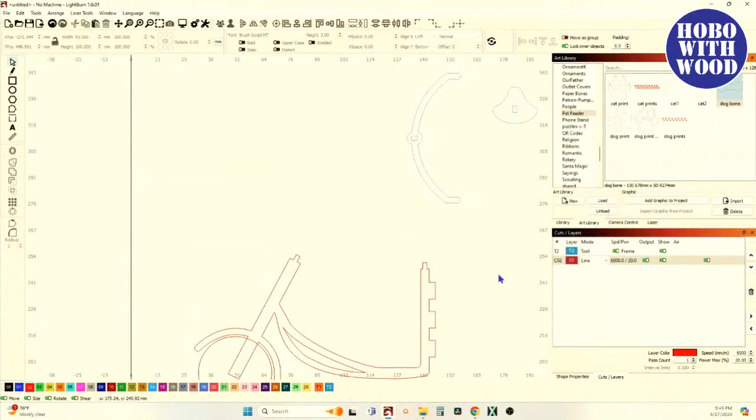All right, so what he's saying here, let's see - switch, go back to my ruler. No, that one's right, that's 3 millimeters tall. And that one's 3 millimeters tall. So that's right, I did those right.

3 millimeters and 2 millimeters, and 2 millimeters. I may have these oriented wrong, and maybe that's what you were referring to.

Undo, like that. Yeah, like that. So maybe it was you that was saying the orient. Yeah, there you go.

Yep, and those are the things that you catch when you go to try to put it together. It don't fit, but now we got that right. Good eye. Good eye, Dan.

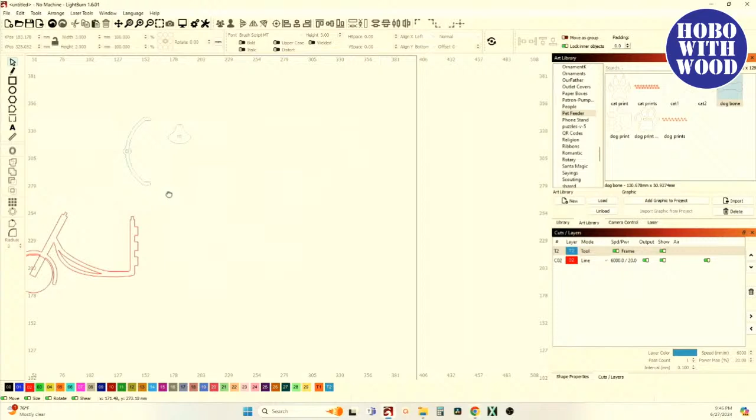All right, so now there would be a rear wheel. I control D, duplicate it. And then for the front wheel, control D, duplicate it.

Oh wow, I used that up there instead of that down there. But you know what, that's okay - all I got to do is say if that one was 35 millimeters, select that entire thing, lock my aspect ratio, 35 millimeters, and there we go. That's the right size. Delete those.

Now I've got to change my inner square, or rectangle I should say, to make it 3. And now it's like, oh no, that's going to make it really, really weak.

That's okay, all I got to do is come back here with my circle, come here to the middle, get my double crosshairs, draw out a perfect circle from the center again, get it to the size I want, there plus there, and control B. That's the one I want.

Say okay, and group it. So now that's right, that's the right size. So control D, duplicate, duplicate.

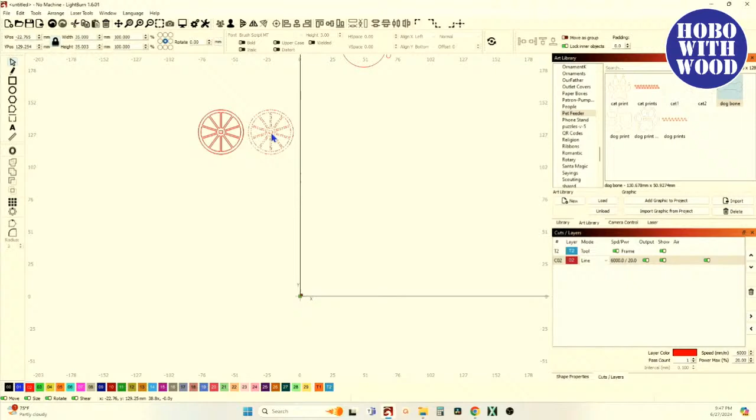So there's 2 duplicates there. So move one over - there's the left and right side of the basket. There's the front wheel.

Now for the front wheel, to hide it in the forks - in fact, I don't need this, ungroup. Delete that, I don't need that in here. And on those front forks, I'm going to put some radius on there.

And now, come to Papa. Selector.

You could extend the wheel tabs on the bottom piece 3 millimeters more and put a hubcap on it. Yeah, absolutely, a hubcap would work.

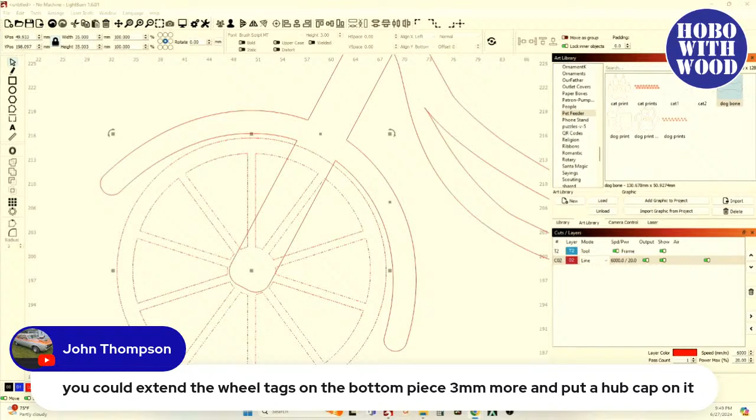And depending on how far you wanted to go with this, instead of having a rectangle come off the bottom, you still do a rectangle coming off the bottom and do 6 like you suggest instead of 3. Then do a piece like this, a little U shape that would fit into the outside of the tire. You'd actually put a cross in the center of the tire instead of a rectangle, so it would slide over that 6 millimeter sticking out from the bottom of the basket. And then this piece would fit in the cross there.

You want to do a cross? No, you do a circle there - this is the cross. So you put a circle in the center of the tire or the wheel, and it'd be a 6 millimeter circle, so it'd fit over that 6 millimeter tab sticking out. This would be 6 millimeters tall and fit onto that tab sticking out.

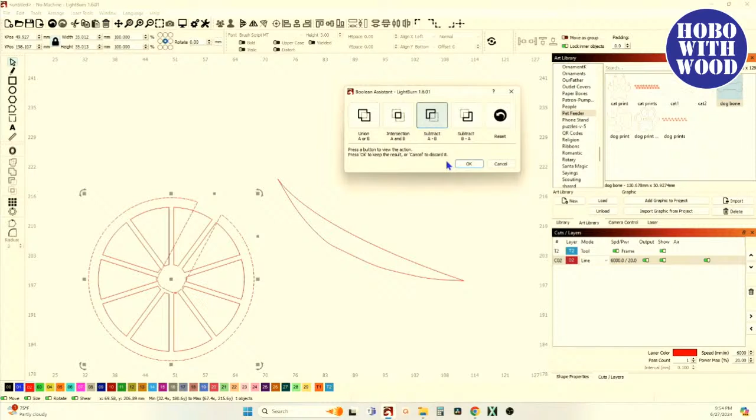If for some reason you did not have that all grouped, and you selected your tire and your bike, and you did Control B... oops, there, part of your forks just went away. You've got it connected to the top of the tire, but it's not connected to the center of your tire.

And wheel. So cancel, select all of the tire, group all that together - oh, not center it up, group it. See, my brain's getting foggy. Control B, and okay.

And there is your front tire welded in place. Like I said, it's not going to rotate, it ain't going to move, it's fixed in place. But then if you wanted to create that illusion of a fork, take that whole piece and say Control D, duplicate it, and put it on a different path.

We're going to put it on the blue path for right now, and I'm going to put it in node editing. In order to see your nodes, it has to be ungrouped. And instead of cutting it all out, you can use cut and cut out a shape, but you can also use your node editing to create a shape.

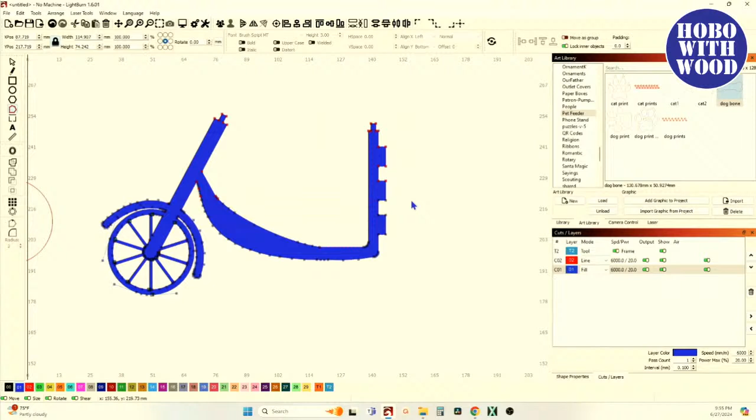You don't want any of this. Just keep deleting the stuff you don't want, select them and delete it down. I don't want that, I don't want those, I want that, and I don't need anything that's on the fender. So you can select there and there, and then come over here.

And you don't want any of that, or that. Oh, did I go too far? Undo. Get rid of that one. I do want to keep that. Okay, so there. Oh, wait a minute.

They're not connected, so you wouldn't want to use that. You'd end up using, I'd use cut shapes. You cut shapes and cut out that piece and just have a piece that would go from there to the center of the wheel to create that fork look.

But the node editing didn't work there. Delete all of the blue, go back to selector tool. Delete, because those, for some reason, were individual pieces. They didn't stay all together as one piece.

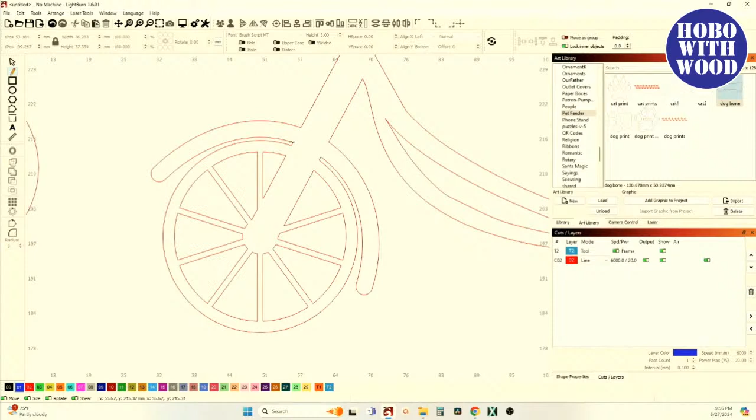Or you could just draw it out. Come up here and say, where do you want the forks? The forks would be underneath the fender from there to there, and then just draw it down.

Because what have I said? How many ways are there to do something in LightBurn? There's 100 ways to do it, 1,000 ways to do it. Then there's the hobo way, and depending on what day it is, the hobo way might be one way this day and another way the next day.

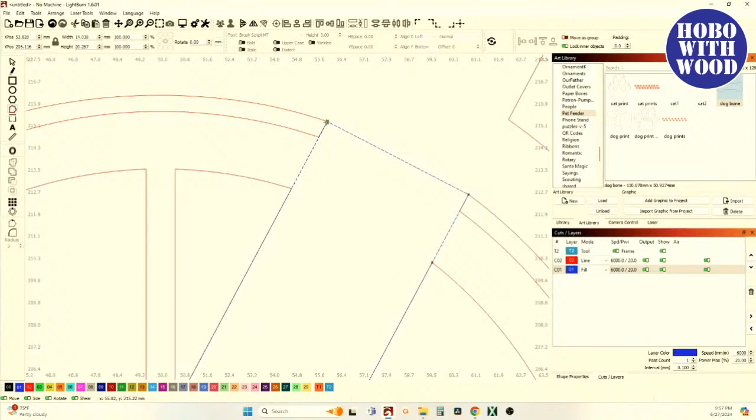You never know. Oops, I missed it. You seen it flash, I had it, and then I didn't quite get it there. Once it goes solid, come on, why ain't you connecting? There we go.

And cut you out 2 pieces like that, and then glue it on top of there, and then it would look like a fork. What the fork?